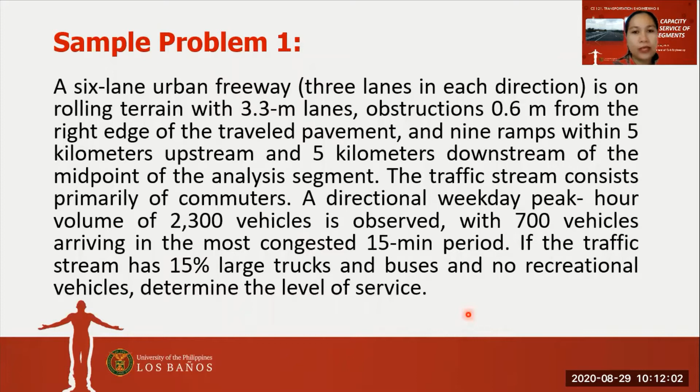So in this sample problem, we are going to determine the level of service of the freeway with base conditions that are mentioned here. So the given information in the problem is also the base conditions that you can use for solving the problem. So let's see. The given information we have include the lane width, which is equal to 3.3 meters. There are 3 lanes in each direction, and it was mentioned that we have a rolling terrain.

And the right lateral clearance is equal to 0.6 meter. The total ramp density: it was mentioned in the problem that there are 9 ramps for 5 kilometers upstream and 5 kilometers downstream. So it means that you have 9 over the total length, which is equal to 0.9. And then, since it was mentioned that the vehicle users are primarily commuters, we can use the driver population factor of 1.0. And then we have a total of 2,300 vehicles per hour.

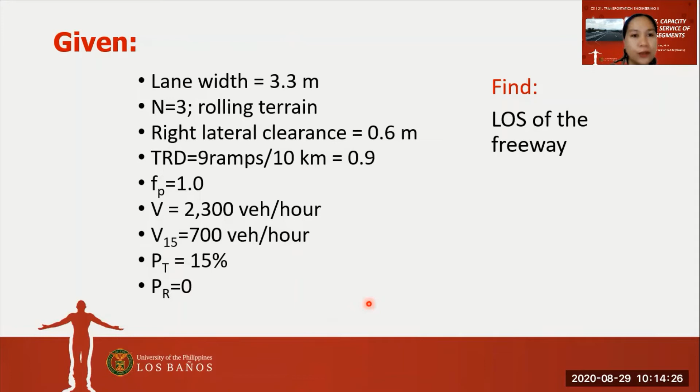And then the most congested 15 minutes has 700 vehicles. It was also mentioned in the problem that the percentage of trucks is 15%, and there are no recreational vehicles, so PR is equal to 0. So the next slides will show us how to determine the LOS following the 4 steps that we have discussed in the previous slides. Since the first step entails the basic information that we have for the freeway, we have already completed that step.

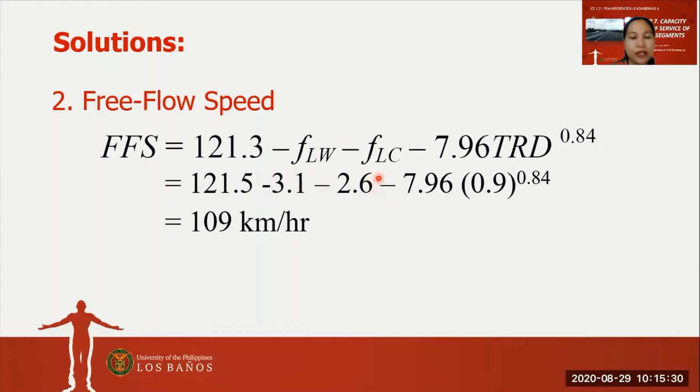So we will move now to determining the free flow speed of the freeway. From the previous discussion, the formula for determining the FFS is equal to this one. So what we need is to identify the factor for the lane width adjustment and the factor for the lateral clearance adjustment, and we are given the TRD, so we just substitute the other information here. So if we already know the FLW, FLC, and the TRD, which is 0.9, then we can calculate the FFS is equal to 109 kilometers per hour. Now, how did we find 3.1 and 2.6 here? I will show you in the next slides.

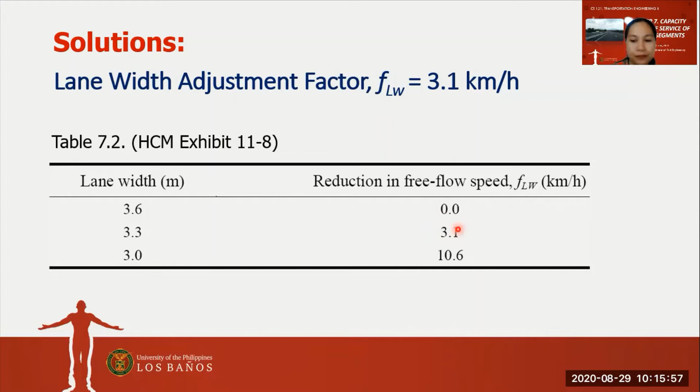So for the lane width adjustment factor FLW, since we have the lane width equal to 3.3 meters, from table 7.2 we know that the reduction in free flow speed is equal to 3.1 kilometers per hour. And for the lateral clearance adjustment factor, we used table 7.3. So what information do we need here? We needed the right shoulder lateral clearance, which was given in the problem, and it is 0.6. And we also know from the problem that we have 3 lanes in each direction. So with this information, we get the FLC, which is 2.6 kilometers per hour.

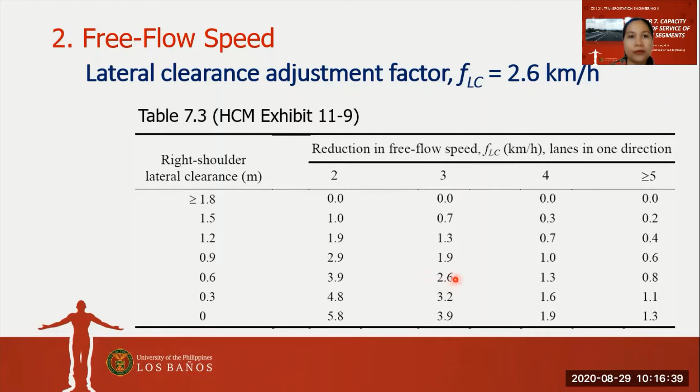Okay, so we move to step number 3, to calculate the analysis flow rate using the formula that we have discussed earlier, which is the total volume in an hour divided by the product of the peak hour factor times the number of lanes per direction times the heavy vehicle adjustment factor times the driver population factor, FP. So in this problem, what we need to calculate first is the peak hour factor and the FHV.

I will show you how FHV equal to 0.816 was calculated, and also the value of PHF. How did we derive the PHF of 0.821 here? Okay, but first I would like to show you how to calculate the flow rate using this formula.

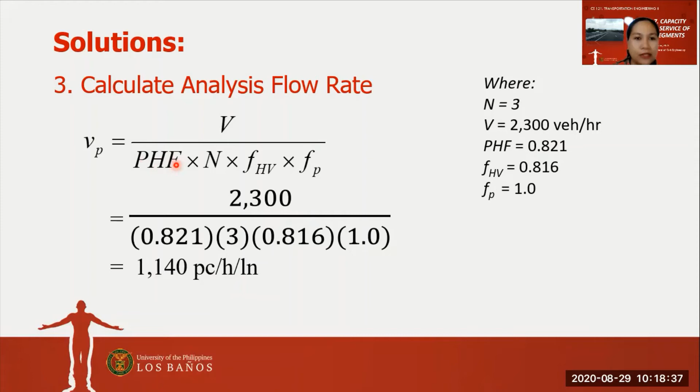So using this formula, just substituting the values, we have V is equal to 2,300, and then we divide it by the product of PHF, which is 0.821, times the number of lanes, 3, times this, and then 1.0, the driver population factor. Now the flow rate that has been calculated is equal to 1,140 passenger cars per hour per lane. So in the next slides, I will show you how this was calculated and how the heavy vehicle factor was calculated.

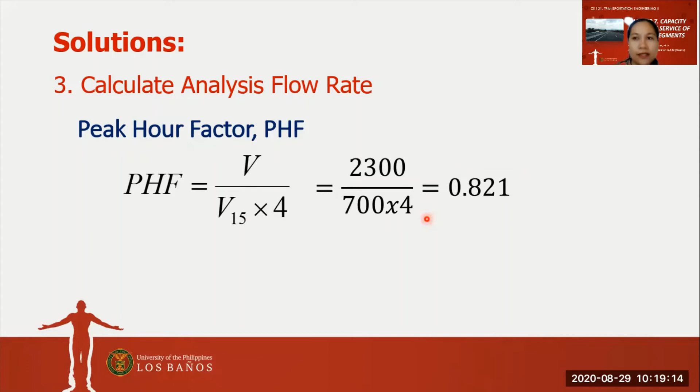In determining the peak hour factor, we have to divide the total volume in 1 hour by the 15-minute most congested volume times 4. So that becomes 2,300 divided by the given vehicles in the 15-minute most congested time, which is 700, times 4. So the peak hour factor is equal to this one.

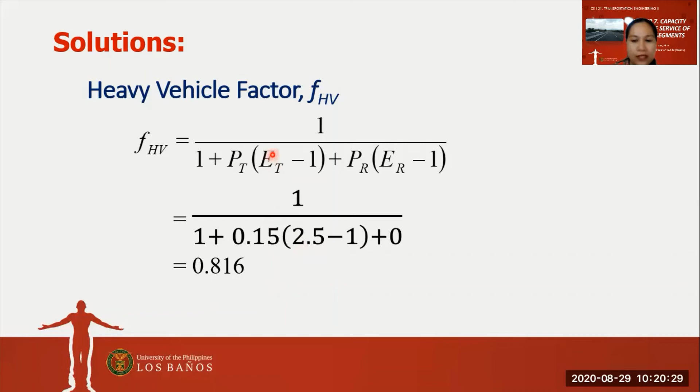So substituting the PT and the ET, which is found using the table, which I'll show you in the next slide, the heavy vehicle factor then becomes 1 over 1 plus the product of this. So it's equal to 0.816 here. Okay, now how did we arrive at the 2.5 ET? I'll show you in the next slide here. Using table 7.4, since it was mentioned that we have a rolling terrain, we will use this column, and we need ET, so ET corresponding with the rolling terrain is equal to 2.5.

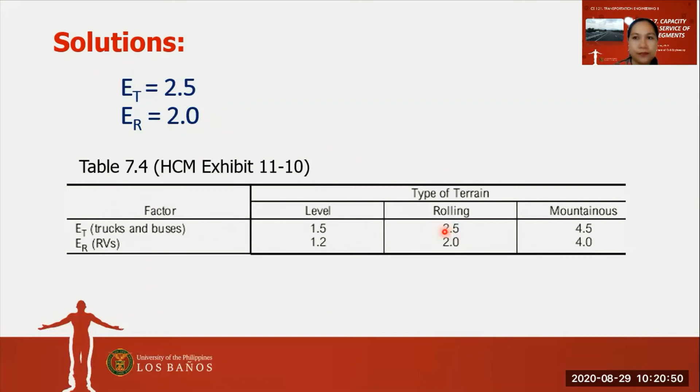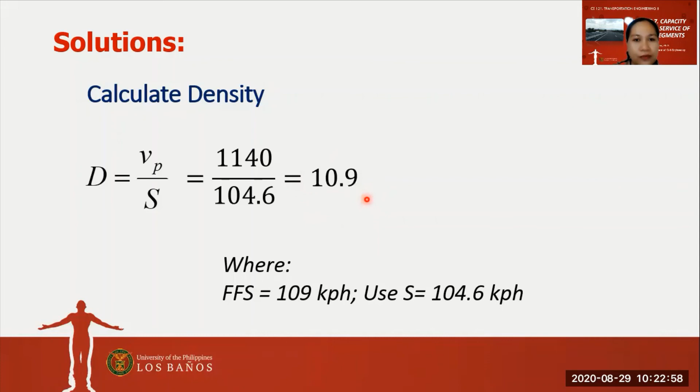So you can use this chart, which I presented earlier. Since the calculated density of 10.9 is in this part, between 6.8 and 11.2, the level of service of the freeway is within the region of LOS B.

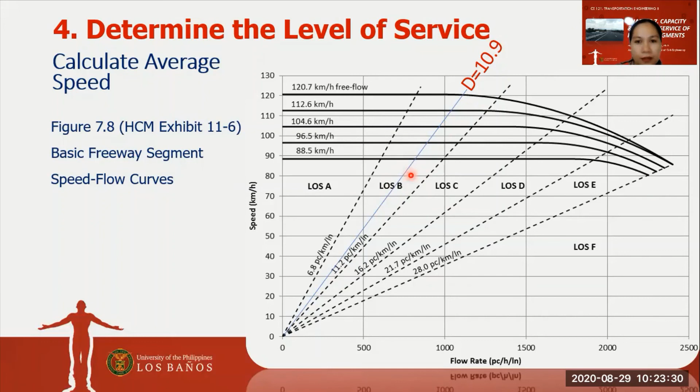Okay, and then you can also use this table to determine the level of service. Since we have calculated the density, which is equal to 10.9, and it falls within the range between 6.8 and 11.2, the level of service of the freeway is B, which is consistent with the chart we have seen earlier. Okay, so that answers the question in the sample problem.